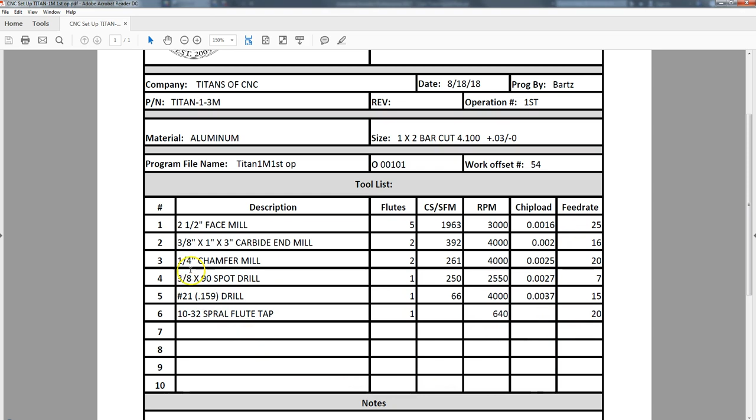Save that. Now that's good. Now if you remember the last time when I left off, I did the tool library. So if we go back into CAM, you can see now I have added the remainder of the tools that were on my tool sheet here with my number of flutes, my RPMs, my feed rate, and I put all of these same labels in.

So we are all set with tools. They have the right tool number. So the beauty of this is now when I pick an operation and then I choose a tool, I don't have to worry about, do I have the right offset? Do I have the right size? Do I have the right feed rate? Okay, so here we go.

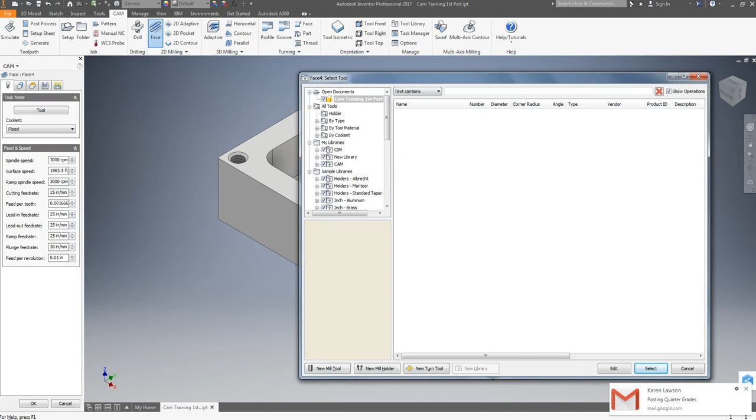So we're going to first mill with the face mill the stuff off the top. So I'm going to pick face, and I'm going to pick tool, and we're going to come to our CAM library, and we're going to pick the 2.5 inch face mill and pick select. So now it plugged in all of those feed rates in. I do want the coolant on, so moving these tabs left to right, here we go.

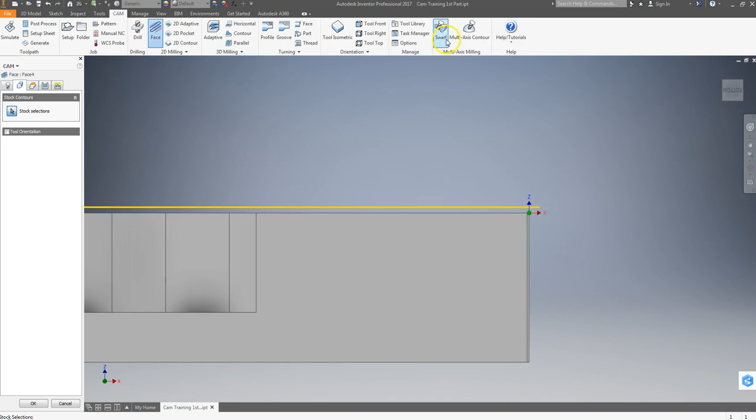Next tab, stock selection. It picked by default. Here's this yellow. Looks to me like it's the top surface. Yeah, it says that there. So that looks correct. Next tab over.

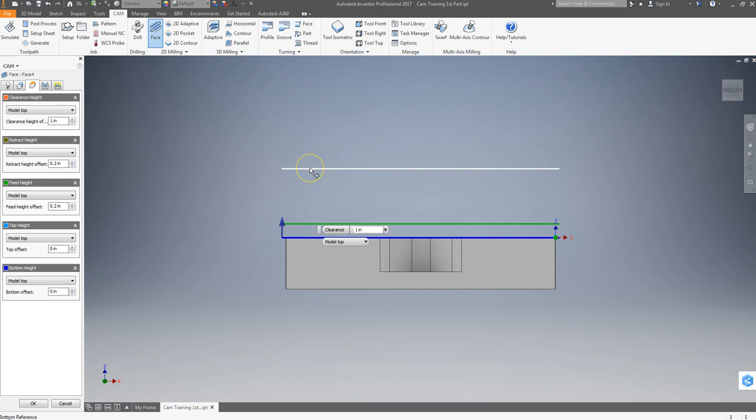Now this looks kind of overwhelming, but each one of these, let me go to the front view so you can see, sets a different height for your tool to rapid to. So this top one is my clearance height. The next one is my rapid height or retract height. So when I come out of a hole, it's going to, or I'm finishing operation, it's going to retract up to this point. And then my feed height, where is it going to start feeding?

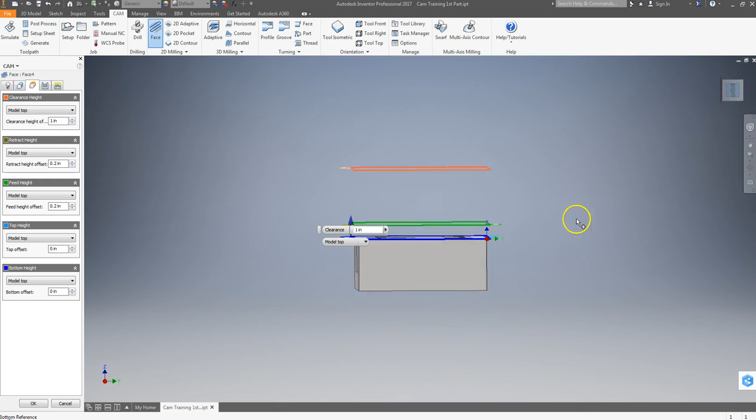Okay, from. So let's go back over here. I always use model top. Okay, that's the top of my model. If you have stock on the sides, you have stock on the top, and you go with stock top, your numbers change because our program, if you recall, Z0 is the top of the part. So you'll have, whoopsie, wrong way, you will have weird numbers.

So model top, clearance 1 inch. It will pay dividends when it comes to doing holes with multiple level steps if you go to the clearance plane. So I always make clearance 1 inch. Now if I have a step that's higher than 1 inch, I would make it higher, but for the most part 1 inch is a good number.

Retract height, 100 thousandths, 0.1. 100 thousandths is close enough to the part but not too far away, because once it starts feeding, time is money. Okay, so 100. My feed height, I make the same as my rapid height, 0.1. Now, when it comes to this feed height and retract height, the only time I make it a different number, you know, if my surface is really wavy because I didn't face mill the top of it and it's not flat, it's unmachined, maybe it's a casting or something like that, I might need a little bit more clearance.

But I always, when it comes to tapping, make it 0.2, 200 thousandths, so that there's a little bit more clearance room to be sure that everything gets synced up. And I think with the technology of equipment now, it's not as necessary, but sometimes old habits die hard. And since it was a valuable habit, I'm leaving it.

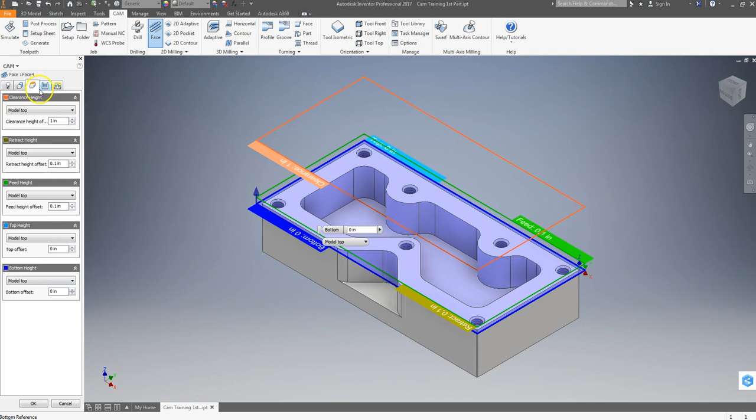Now we have some options here. Here's my tolerance. How accurate does it have to be? My pass direction. I can go on an angle, and if I hover and hold, you can see I can go on an angle. I just want to go straight, so leave it at 0. Pass extension. So I have a 2.5-inch cutter. It's going to go.

Do I need to extend it out so I'm away from my part? Well, if the back of the cutter stops at the side of my model, it isn't really off the part because I have some extra material or stock. So I'm going to add 100 thousandths. That should give me clear.

Stock offset - I'm not going to offset. Step over, that's how far between paths. If we look at this, that's a horizontal step over, that's how much space between passes. I don't need any, so we'll just leave it alone.

I don't know why it chose that number. Sometimes it randomly does, it might remember from the last time I used this tool. I'm not sure. If I'm taking multiple passes, do I want to go both ways? Do I want to go climb? Do I want to go conventional? Those are some choices. Right now I'm going to accept the default.

Multiple depths - now these things you have to pick to expand to get the stuff. So if I had a lot of stock and I wanted to make a couple of passes where I only take 50 thousandths, move down 50 thousandths, move down 50 thousandths, this is where I would use this step down. If it's checked, it's going to go by these numbers. If it's unchecked, it is not going to do multiple depths.

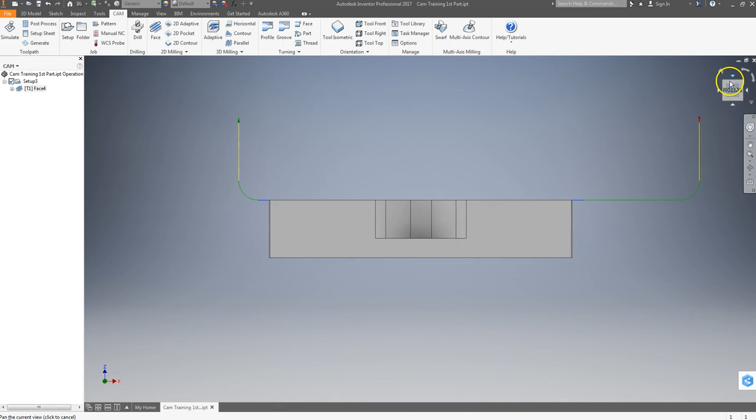Okay, let me tilt this. It looks like it did do an extension here of that 100 before it starts to come out. So I'll accept that and see.

Now what we're going to do is we want to simulate this. I want to see, does it crash? What does it do? So I'm going to come up here to simulate. It shows me the cutter, I can press play. Well, that's the beginning. So now I have some options here: tool path, show the point, show the axes.

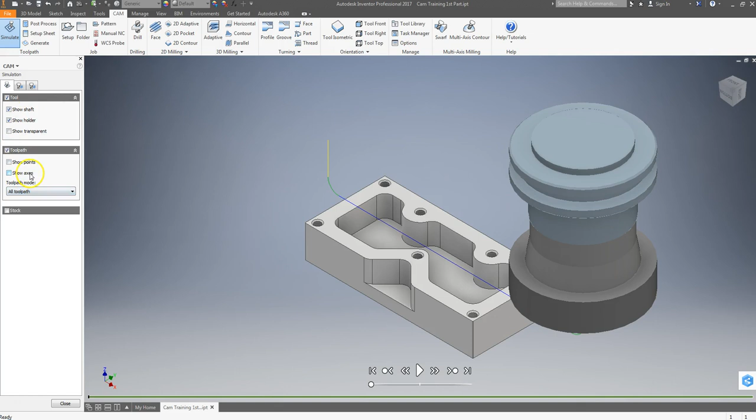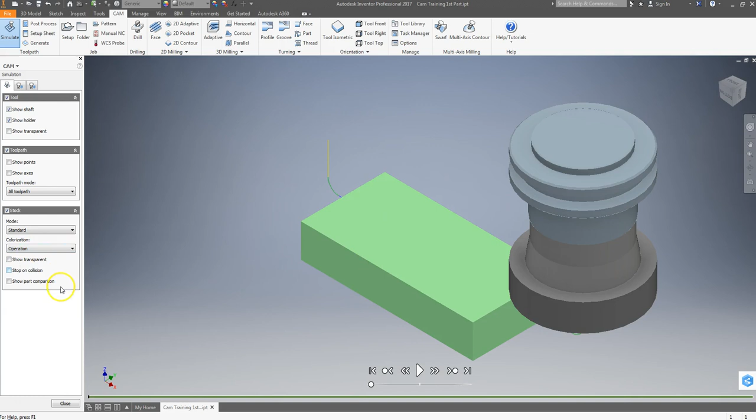If I pick stock, it makes it a solid. I have found that if I use tool, use operation, it will change colors. Okay, so let's say go. So it comes down, it goes this way.

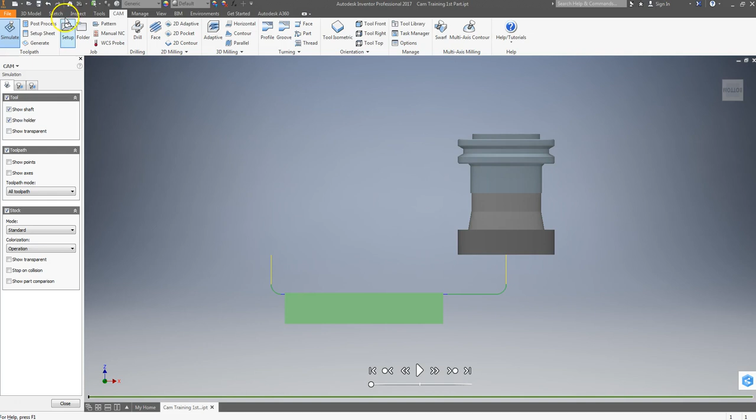Let's look at it from the front. Reset it. Play. So it comes down on the part. That's no good, it goes off the part, but it comes down on the part. So we have to fix that.

All right, so that is somewhere in our settings, and I've done this before, and sometimes it's tolerances, pass direction, pass extension. Okay, we got the extension we want. Offset I don't want. Step over, direction - let's go both ways.

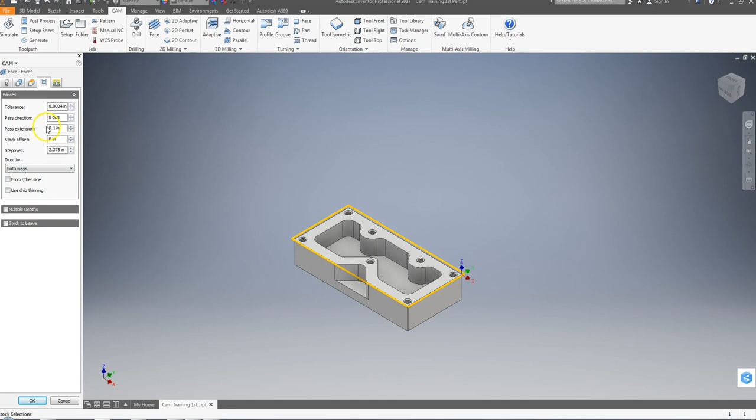Oh, extend before retract, there it is. So this will enable to extend the cutting pass beyond the stock before retracting. So I think that's the one, extend before retract. So let's say okay. There we go, see, now there it is.

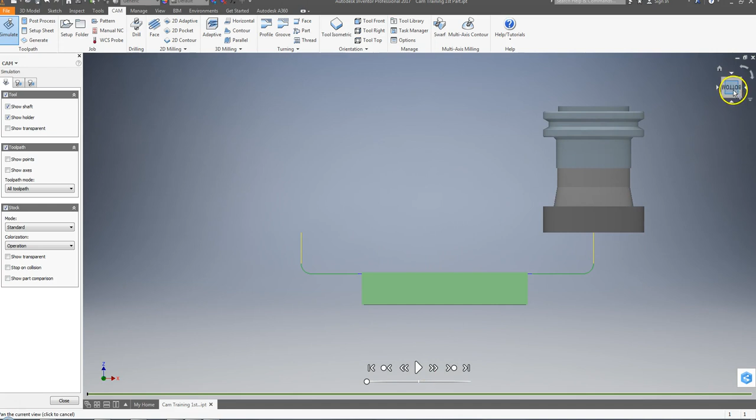So now let's simulate. Reset. Play. So now there we go. Let's go to the front view. Reset. Here we go. So there, it's off the part. It goes off the part.

Okay, so now it should have cut stock off the top. So something has caused us - the bottom height is, should be the model top.

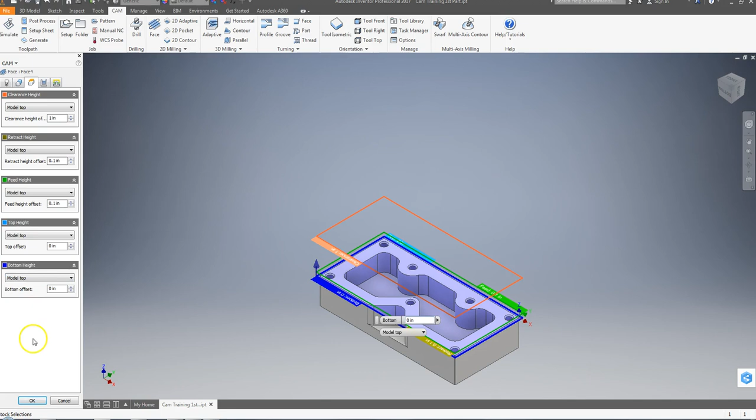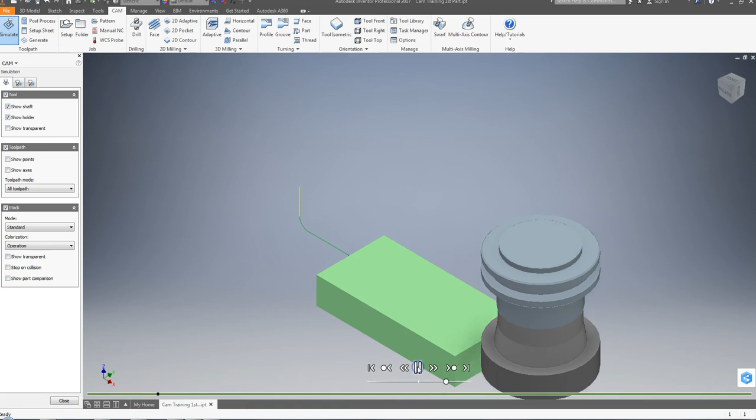Let's look again. Maybe stop collision, show part comparison, operation. Nope, don't want transparent. Go. Oh, there. Now that I can see this, it actually did. So, okay, it was working and I didn't see it.

My facing is done. Now when it comes to end milling, there's a couple of choices. 2D pocket to rough all of this out and leave stock, and then if I'm only leaving stock on the sides and the floor has been taken care of to depth, then I can just use contour to come around. Otherwise, if I'm leaving stock on the bottom because I want to finish the bottom and the sides at the same time, then I would use 2D pocket again.

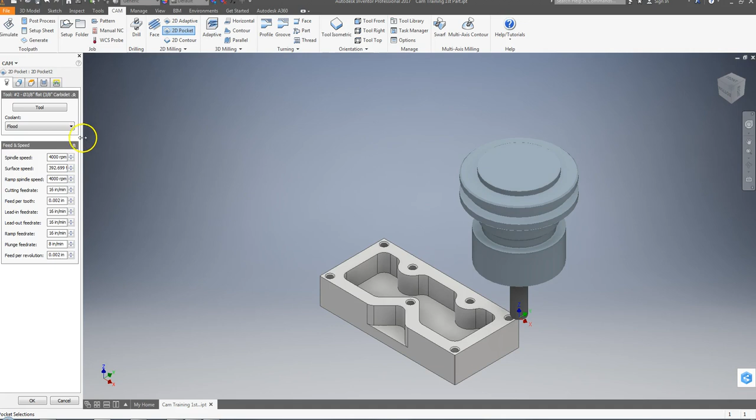So when I use 2D pocket, our tool is going to be—see how it added that up here with the operation. So CAM, 3/8 end mill, select, there's my tool, put all my stuff in. So I come over here, I want to pick my geometry. So I'm going to pick the bottom. There, it picked it.

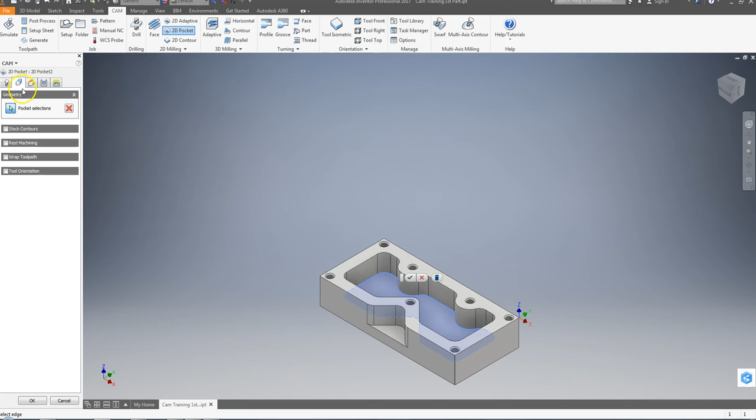Stock contours, wrap, tool orientation. Shouldn't have to change anything there. So now we go to this. Clearance height's an inch. Oh, notice how these change. Stock, top, up, up. We got to first make it model top, 1 inch.

Model top, retract 200. We're going to go 0.1. Model top, 0.1. Stock top—we don't want stock top. We want model top. And we want to go selected contours because we picked this down here, remember?

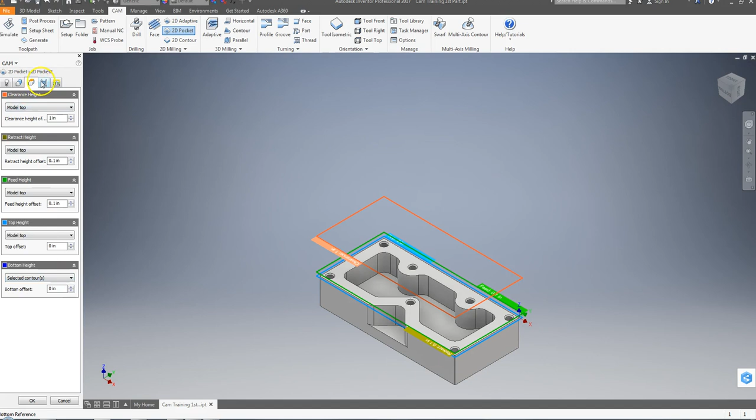Okay, so now I'm going to come over here. Here's where we get a lot of choices, okay? I want a climb mill because that'll give me a better finish. Maximum step over—that's how far between my paths. You really don't want it to be more than 50%. So if I got a 3/8 end mill, I shouldn't want it to be more than 180. I'm going to go to 0.1.

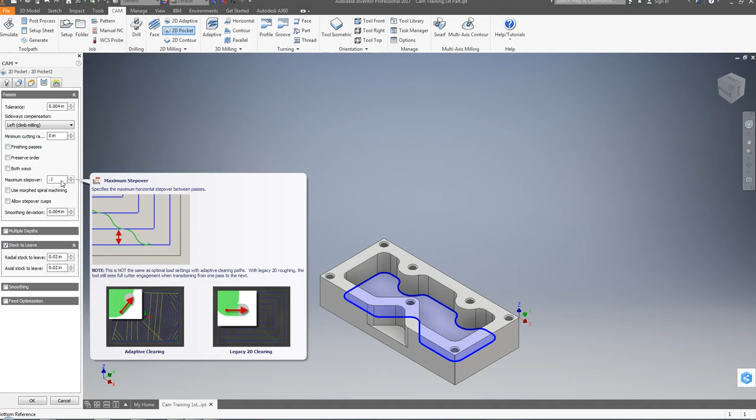Okay, now there are some machining things that have to come into play. If I'm going to do full depth in roughing this out, can I really take half the cutter on a 3/8 cutter all in one shot for that whole depth? Probably not. So we're going to come back and say we're only going to take 100 thousandths at a time on a side, okay?

So we have some choices. Use spiral, morphed—those are some different ways that it can handle things. We're going to go multiple depths. So we're going to do max roughing step down—that's how much do I want to go down as a maximum. I'm going to say 0.25, 1/4 inch.

Finishing step down 0 because I want to use a different thing. Finishing step down 8 thousandths. Wall taper 0 degrees. Use even step downs—yeah, make it even. Okay. Stock to leave—do I want to leave stock?

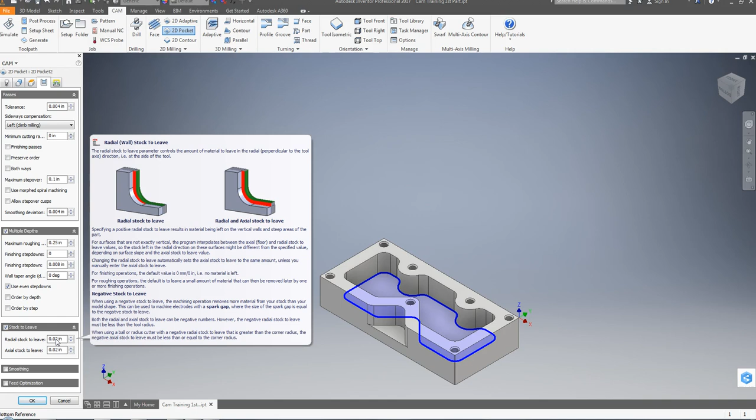Now, radial is stock on the side, I believe. Radial is the wall. So that's 20 on the wall, 20 on the bottom. Okay? So I'm liking that.

Come over here, linking. So allow rapid retract, safe distance. The safe distance is what's safe for it to be rapiding around at. I'm going to say 0.1 because that's what I determined before. Maximum stay down.

So when it's doing machining, 2-inch max stay down, so it's going to stay down more if we look at this one on the right here than a 1-inch. So nope, won't let me see it. So I'll just leave it at the 2.

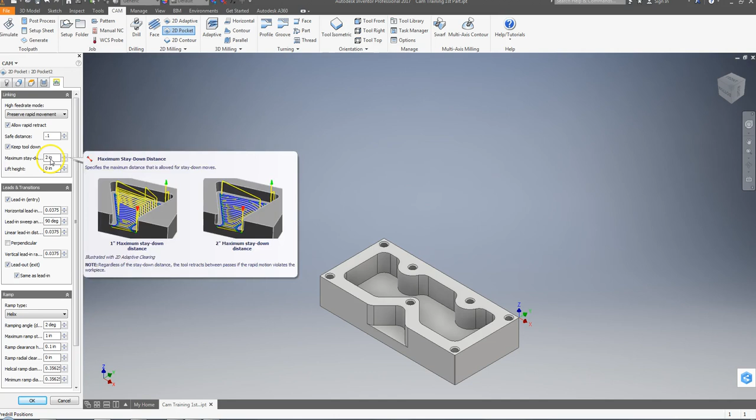Lead in, lead out. So if we're going to use cutter compensation at any point in time, we need to be able to control it with offsets, and you have to have a long enough lead in. So we would like more lead in because you got to have room. So 100 thousandths lead in.

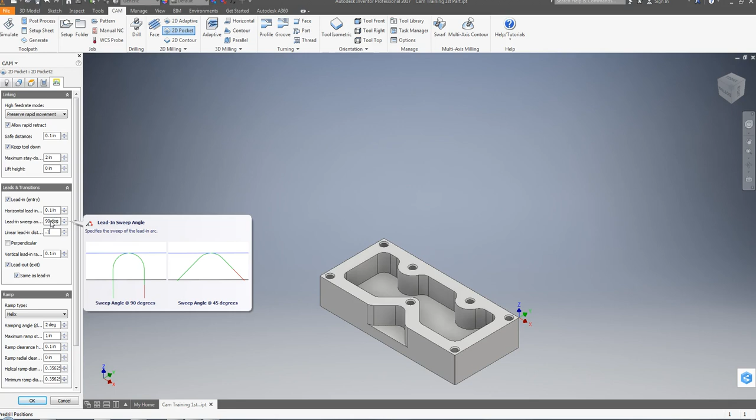Go back to 100 again. 90 degrees is the angle that it takes on the lead in. Okay, or I can do 45. I like 45, but sometimes 90 is just as good. Vertical lead in—now you saw on the face mill it kind of went down and arced in. We don't really need that. So we say 0. Lead out, exit, yes. Same as the lead in, yes.

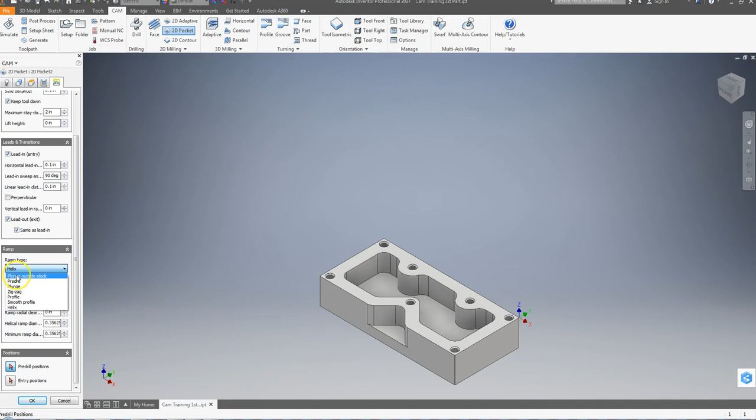Now ramp. So I'm doing multiple steps. It's going to be coming down. How am I going to get down there? I want to do ramp. I got a choice—I can do a helix, I can plunge, I can do a lot of things, I can zigzag. I already had a hole pre-drilled. Helix is really good, it spirals around. But a 2-degree ramp is too long, it takes forever. So I'm going to say 10 degrees.

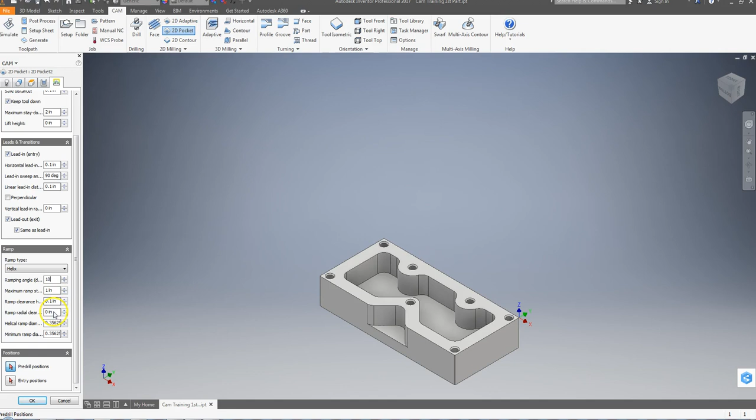Maximum ramp step down is 1 inch. Some of this, like I said, we can just go by with what they say. My last one, I'm going to say okay, now it should generate the toolpaths.

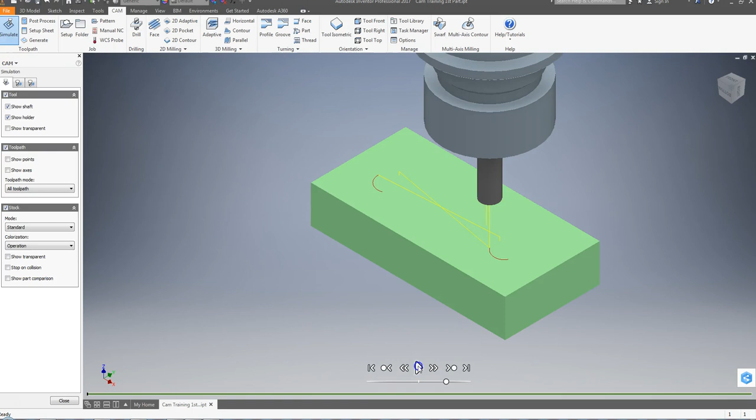So if we look at this, this red is the spiral helix—that's how it's getting in there, and then it's going to cut around, then it's going to go down the rest of the way. So if I leave just this one highlighted and I simulate, it's only going to show what this tool did.

Now, if you ever get red while you're doing this, it's a crash. And it's usually because you didn't design your tool with enough length for the depth that you're cutting.

So now, close that. If I want to see the whole thing, I pick up here on Setup, up top, not that, just once. Pick once on Setup.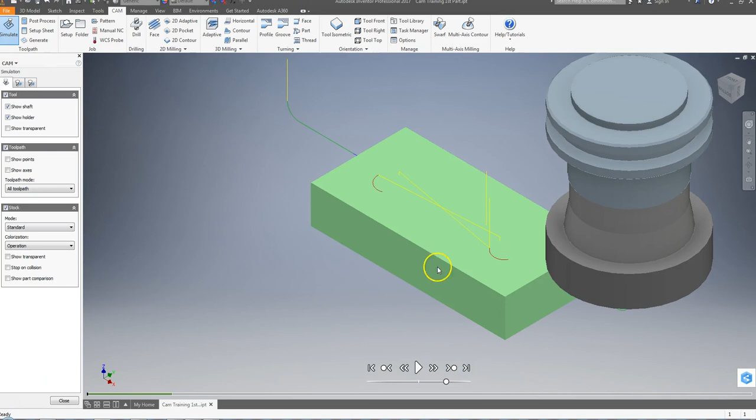Now if I simulate, it does all of the operations. So it faces, and it does this. Oh, this is my speed. That's why I was messed up before.

I forgot. So here we go. You can see that it did 2 steps. Notice it changed colors. It did green on the top. Now it's doing blue. Looks good to me. So I need to finish this.

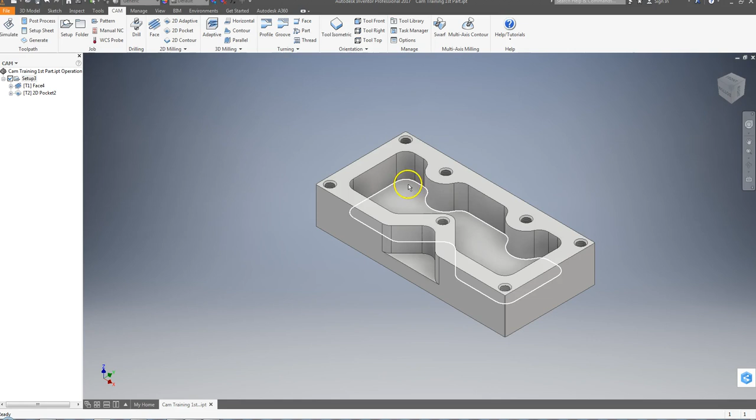I want to do it the same way, except I'm going to not do step downs, and I'm going to take the stock off. So I'm going to right click, copy, and paste. There it is. Now I can go in here.

If I pick slow, I can say 2D pocket rough. Pick, get rid of the 2, and I'm going to say finish. Okay, so finish, go in here. It should keep everything, the same tool, everything.

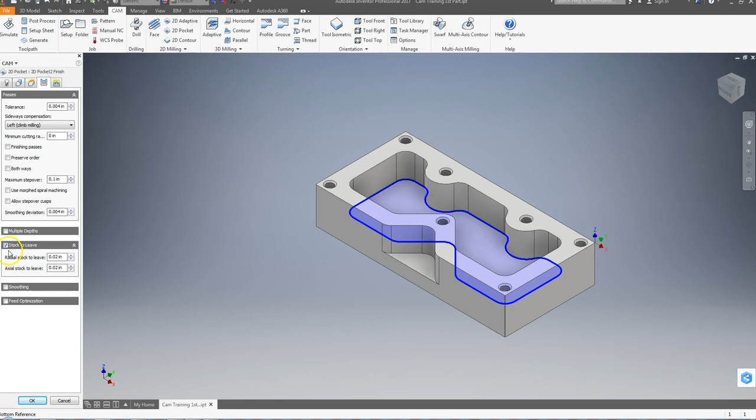It should have my geometry picked. It should have my work planes done. Where I'm going to need to change is keep my step over the same, uncheck multiple depths because I'm not doing that, and uncheck stock to leave. I don't want to do that. Now I should take it to finish size. So all of this stuff should really be able to be the same.

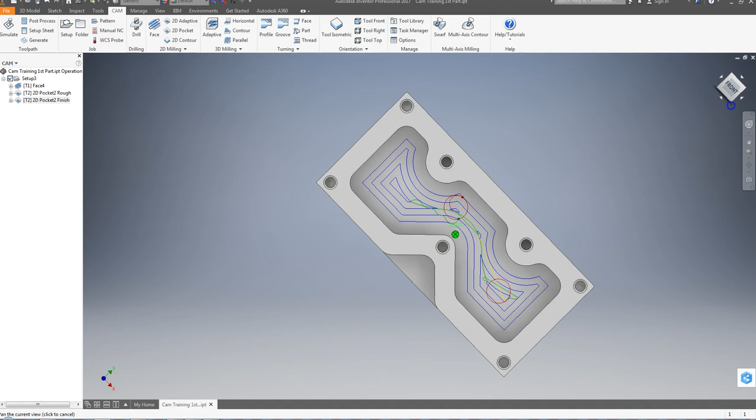So, okay. There we go. There's my helix. Why do I have 2? Oh, okay. Let's see why.

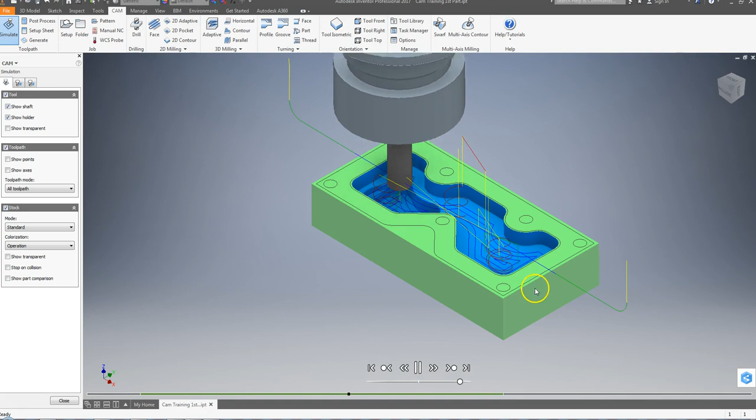So I'm going to pick Setup, Simulate, and let's watch the whole thing. So it faced, it's roughing. Notice compared to the line here, it's leaving an edge. That's our stock.

Now this is all visual, but it's pretty decent. Gives you a pretty good visual. All right. Tool change. Now we're coming into finish.

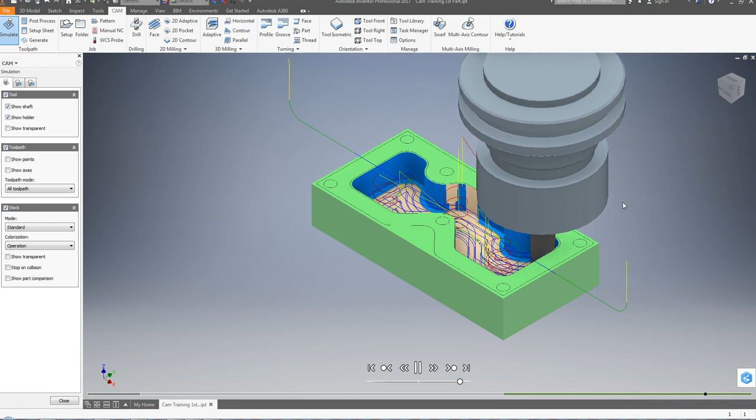So there it's a different color. So now it's doing the floor, working its way around. Now it's cutting the outside wall. There you go. So that does pocketing, face milling.

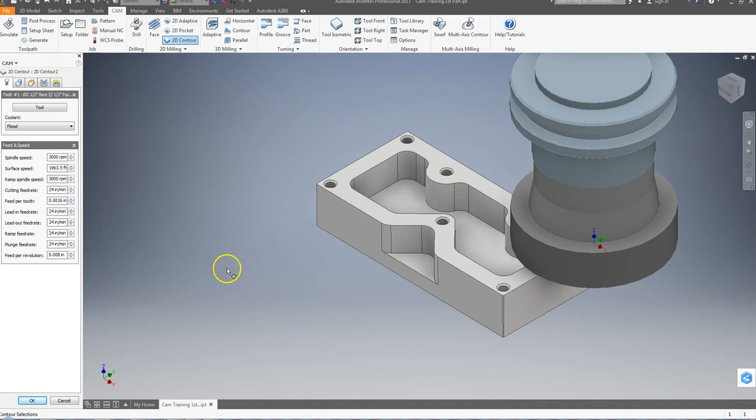Now, if I were going to contour this outside, I'm going to finish this outside. So we're going to do a 2D contour. Oh, it thinks this is a 2.5 inch face mill. We want to come back and get a 3/8 flat end mill. There we go. Has all the right stuff.

Come over here, contour. I'm going to pick the bottom. That arrow shows the direction it's going to go. Okay. Stock, don't need to change.

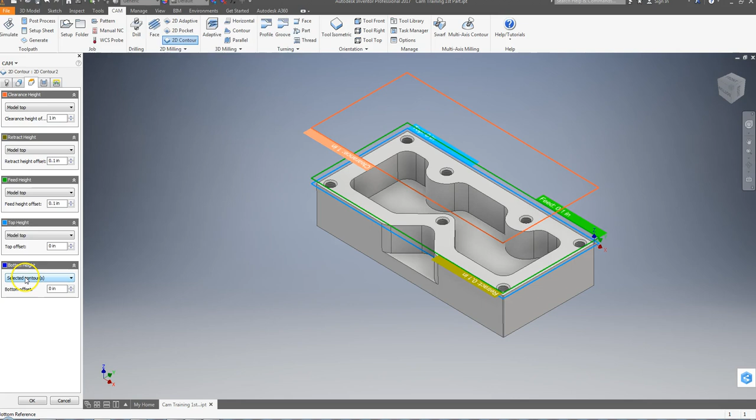Come over here, passes, climb milling. Now here's the big one. I want to climb, but here's the big one. This is compensation type. In the computer, when it posts it to make the code, it will adjust for the radius of the cutter to put it so that it's on the outside, cutting with the side of the tool. I have no control of changing the size.

If I use a 370 cutter instead of a 375 cutter, it's not going to change the size. So, in control is where it's not calculated to offset it, so it puts the numbers that are directly off my print, and it puts in a G41 or G42 depending on what I'm going to do. So I want in control.

Compensation radius allowance 118.5. That should be fine. The tool diameters that can be used safely. So down to that. Multiple finishing I don't want. So here's a finish feed rate, because sometimes you go faster

and other times you go slower. So that's 16 finish feed rate. What was my feed rate for? 16. Okay, so it picked up the default. Finishing overlap, lead in, no. Roughing, multiple depths, stock to leave, smoothing, feed operation. So I don't see anything else I need to do.

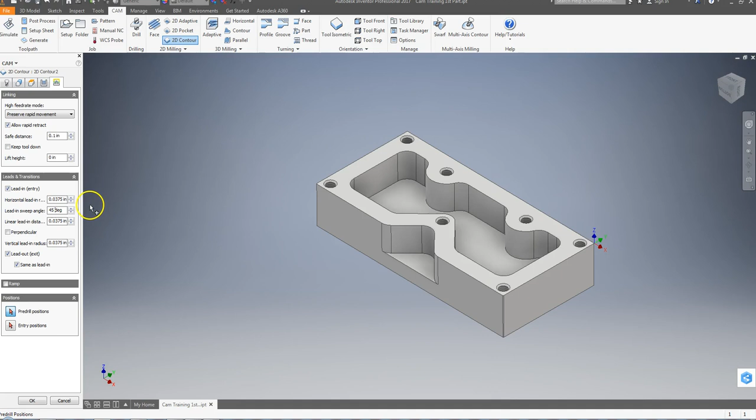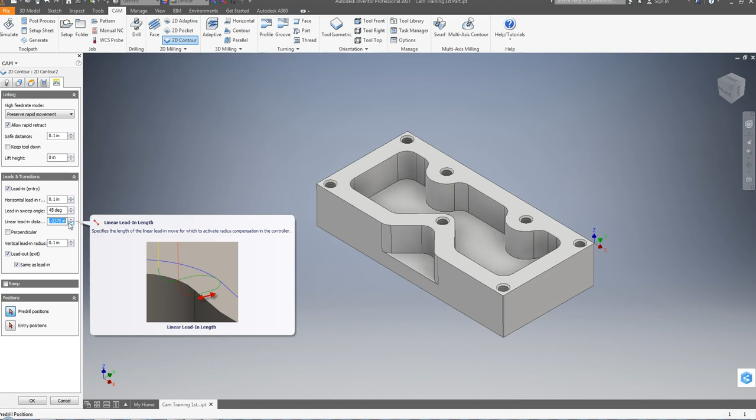Lead ins, lead outs. So I'm going to try a 45 so you can see that. And horizontal lead in, I'm going to say 0.1. And linear lead in, I like to make it a radius, or actually I like to make it the tool diameter, so let's say 375. And I do not want a vertical lead in radius, so I'm going to make that 0.

Lead out, lead in the same, so I'm going to say okay. So there's what we got. Let's go around that side and look. Here, and then the radius goes around, comes out. That's to turn on cutter compensation and to turn off cutter compensation.

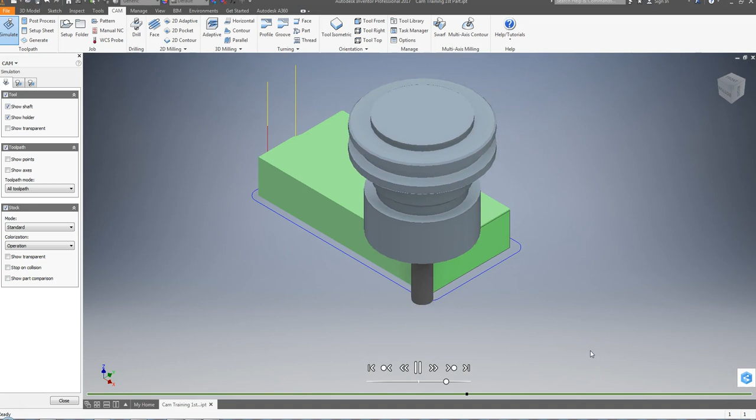So let's simulate this real quick. And it cuts around like so. Okay, so close that. Let's look at all of them. Pick here, simulate, go.

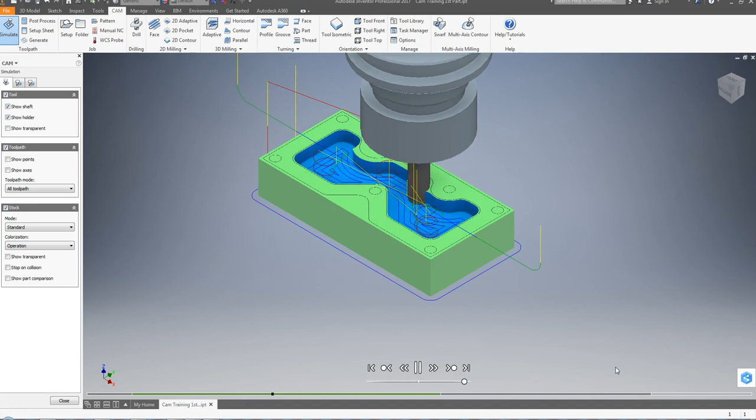Face, rough, finish, cut the outside. Notice it changes colors for everything. That helps let you know what got cut.

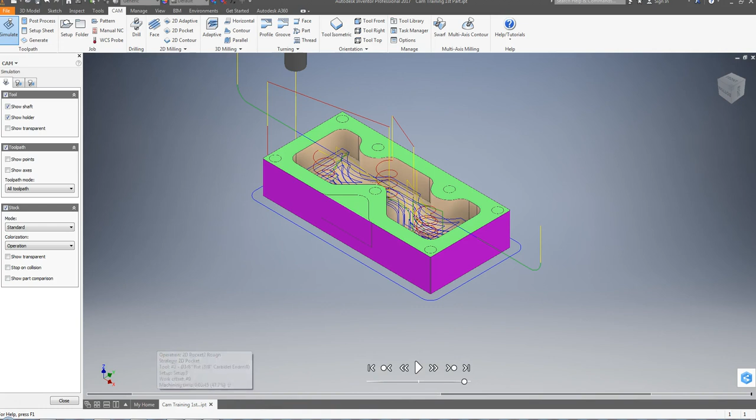All right, so we're going to stop right there in this video. That goes over facing, 2D pocket, how to do a pocket both rough and finish, and then how to use a 2D contour. Okay. All right, so we'll see you next time. We're going to talk about taking care of holes, drilling holes.